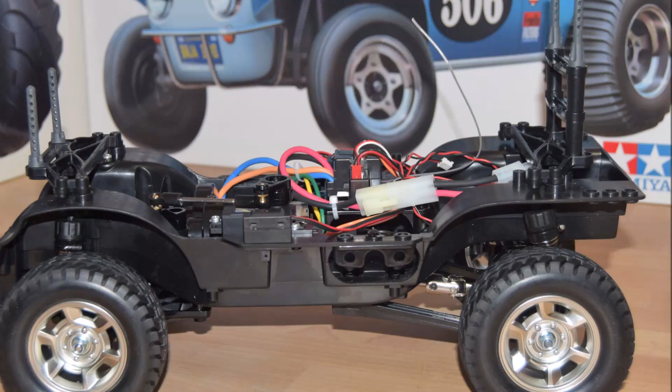Hello and welcome to my build video of the brand new Tamiya Land Rover Defender 90. It's just come through the post and we'll get started with step one.

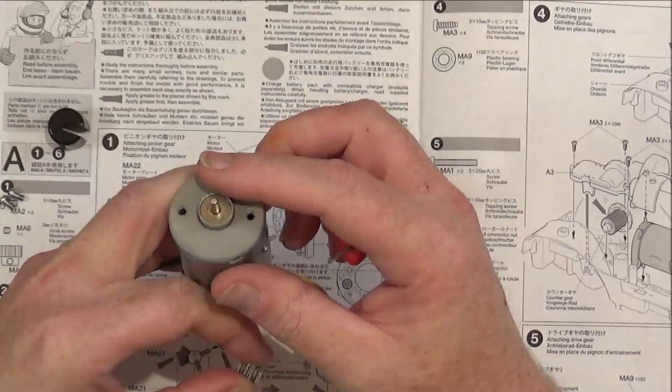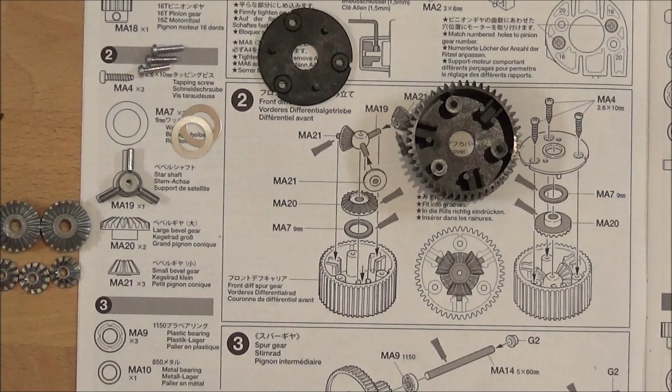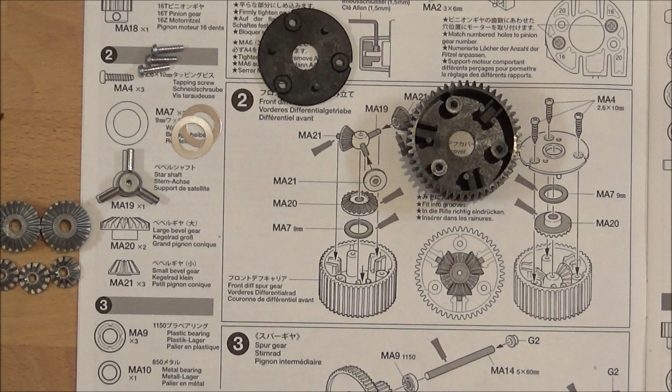Step two is building up the front differential. Now with the CC01 you can actually lock the rear diff. There's factory supplied bits to lock the rear diff, but there's nothing to lock the front. Where I'm planning on taking this for my first run video, I think I'm really going to need the front diff locked as well, using one of these little planetary gears. So I'm going to have a go at that. To lock the diff, it's got to go in there and seat in with them.

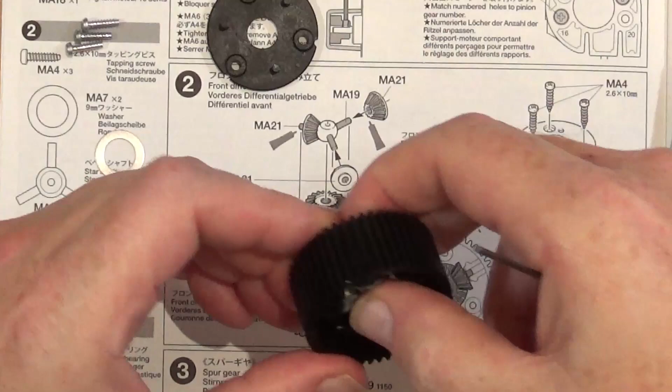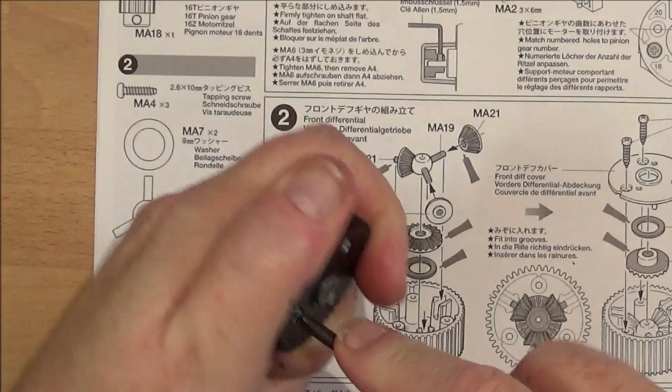They do say it's quite tricky to do. Let's try that. I think that may be in. And there we have one locked diff that I can take apart and unlock as and when I please.

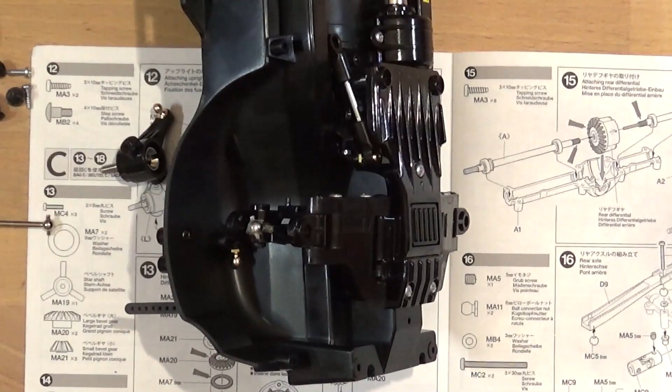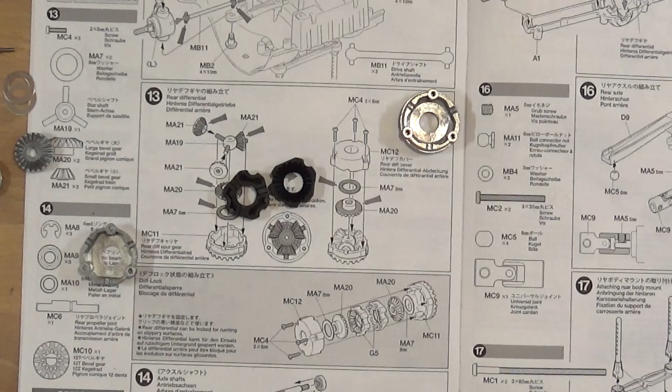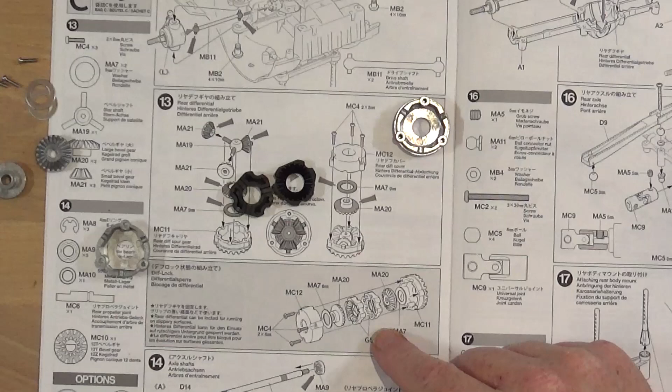Step 13 is assembling the rear differential. Now there's two ways you can install this. The first is using the crown gears and planetary gears to give you a normal differential, but Tamiya also supply two separate pieces called G5 that enable you to lock this diff without anything, like we did in the earlier one. So obviously that's the way I'm going to go. I've got my two plastic pieces, so we'll just get cracking.

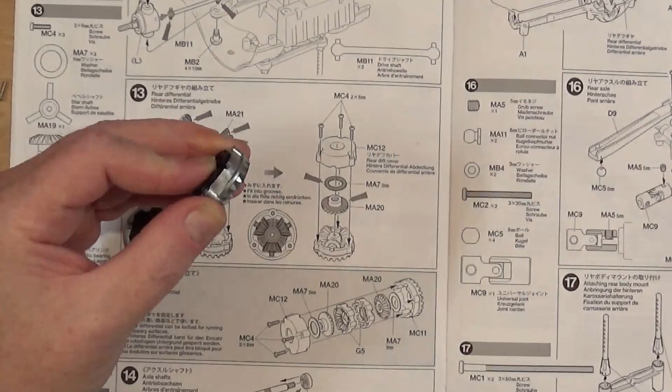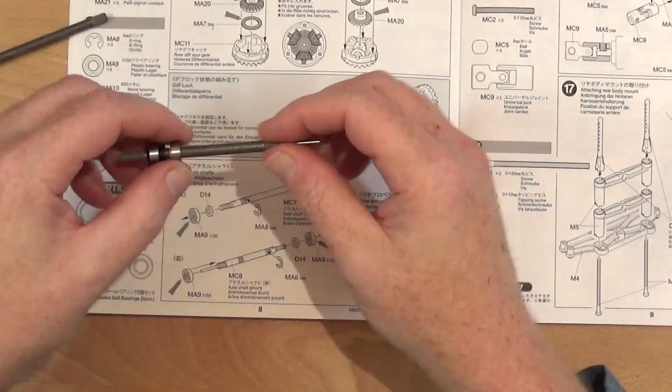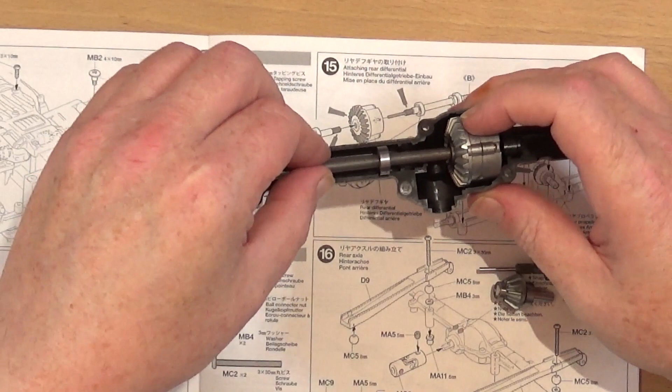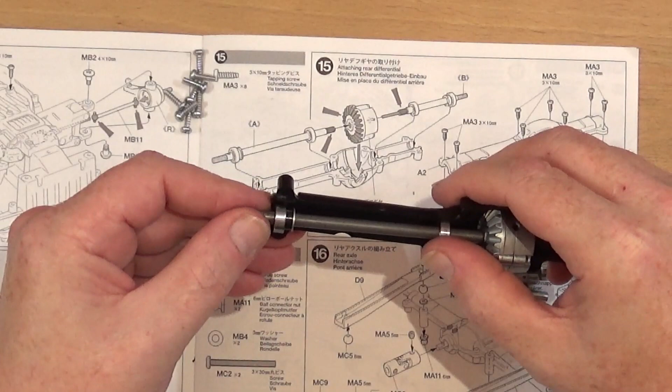Step 15 is basically building the actual rear axle. So we've got the differential and the two axle shafts, but before I start, I just want to show you something. If we pop these in here like so until it fits, there we go - you'll see, if I hold this and get it closer for you, how much movement there is in that. Ridiculous really. And it's the same the other side, which I think is unacceptable really.

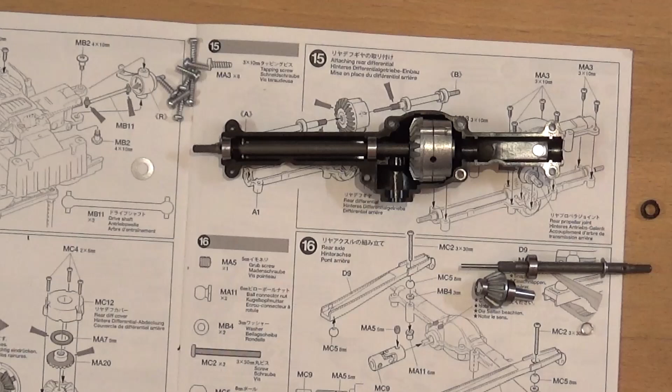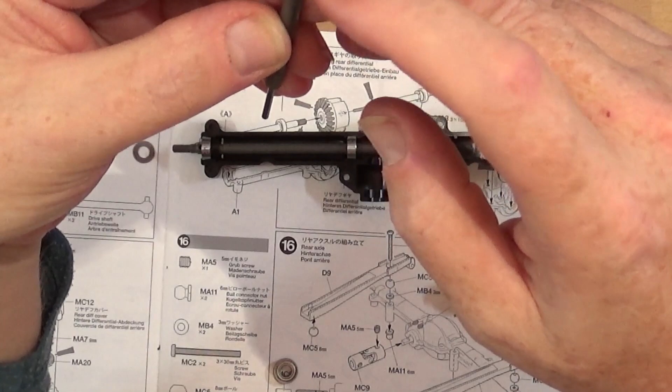So what I've come up with for this one - last time I had more of these washers that fit over, so I was able to use them, but I've only got that one. What I have found is these, basically like mini key rings - they're spring steel in a loop, and I've managed to get one of these over the shorter shaft and push down, and that's a really tight fit.

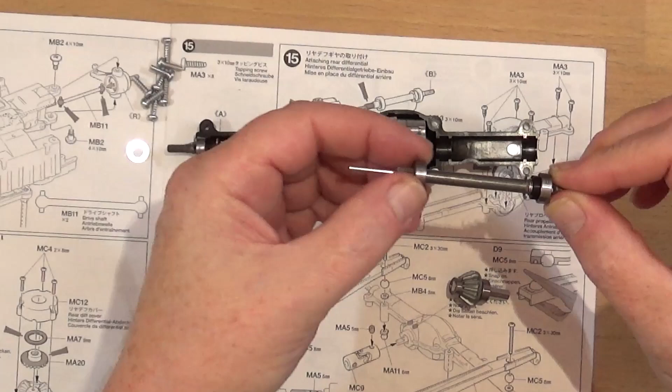So we can then put the other bits on, not forgetting the other bearing, and we can slide that in, and seat that home, and that gives absolutely no movement at all, but still gives it a nice clean unobstructed rotation. And it just so happens that there is still a bit of movement on this edge, if you can see there.

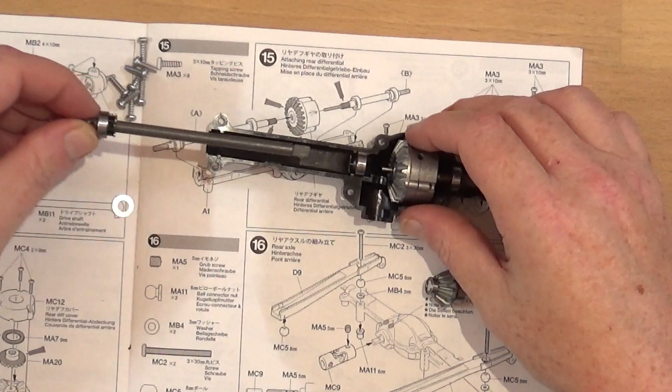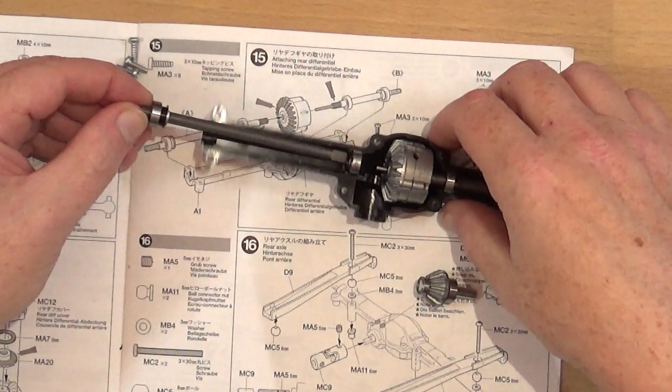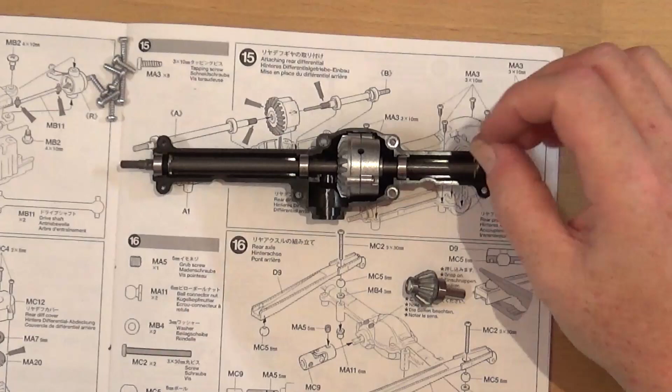Luckily for me, not being able to get it out, there we go - I've found that just one of these big, I'm not sure if they're M4 or M5 washers, fits nicely over, and then slots nicely in. A little fiddly, but not that bad. And then we've got no movement at all in the rear axle. So to me, something worth doing, but entirely up to you.

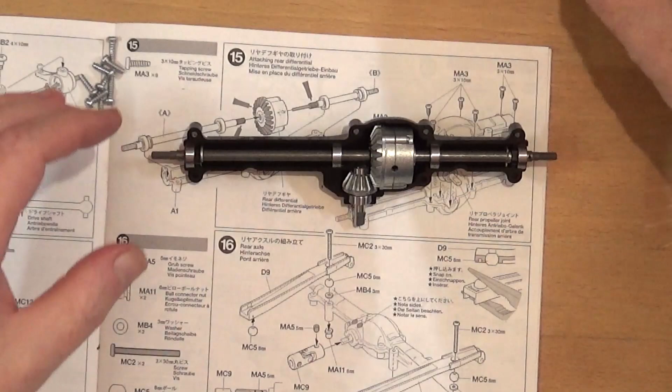The only other thing then is to install this pinion gear, which I did test and it's fine. But obviously it needs greasing up, and then the only other thing is to put the other half of the axle on. Again, I've gone round with some anti-wear grease, and it's 8 screws.

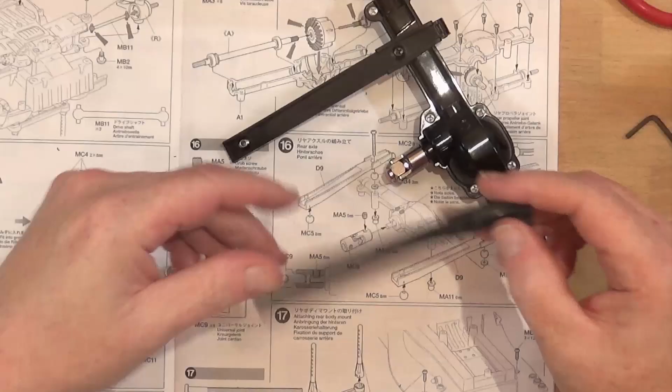Step 17 is attaching the rear body mounts. And holy moly, now that's a long screw for a 1/10 scale kit.

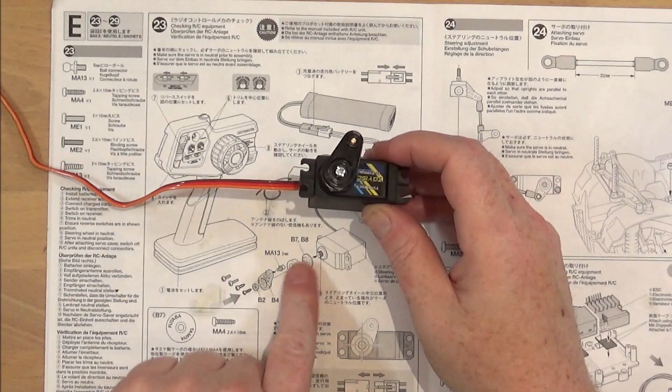Step 23, and the start of metal parts bag E, is basically centering the servo and adding the servo saver. You need to put a ball joint on the back facing backwards like so, and as you can see I've already fitted the servo saver - it depends what servo you've got, which will depend on which parts you need, either B7 or B8. So that's the servo saver installed.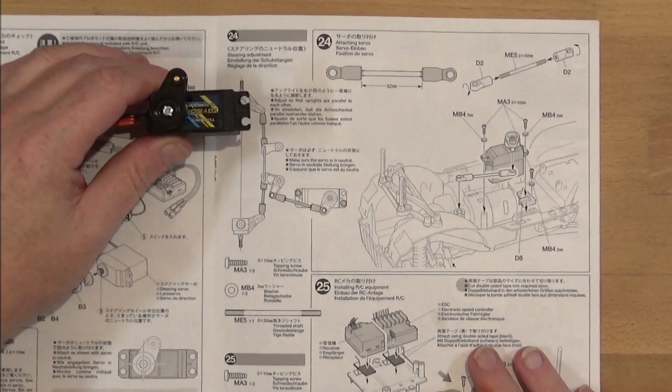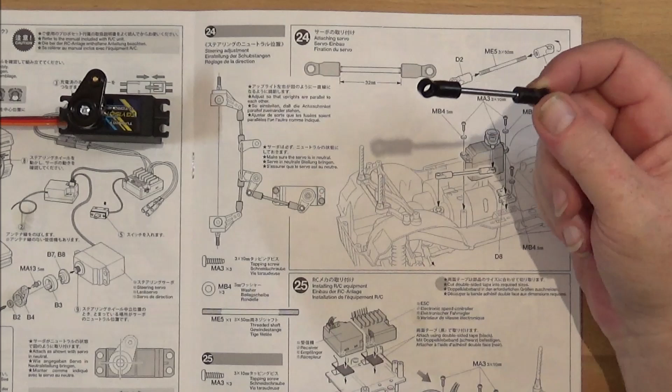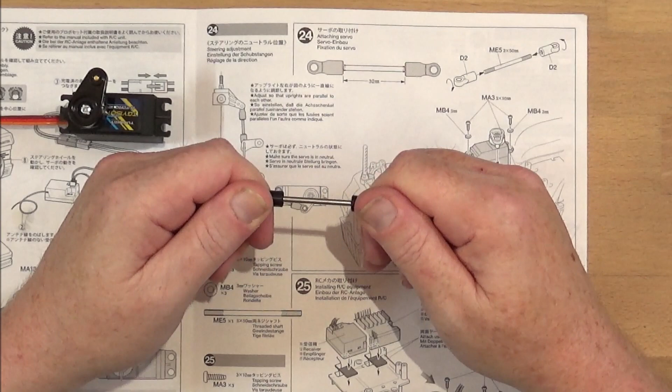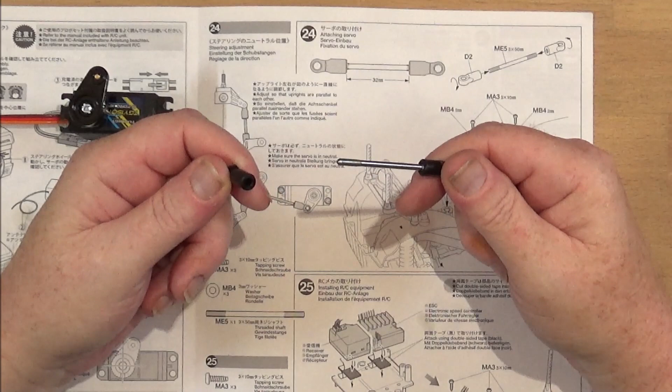We can then move on to step 24, but before we start this I've hit a problem. I was just making up the servo steering arm and found that one of the plastic ball joint connectors does that - I don't know what's happened. It's the first one ever I've had on a brand new Tamiya kit that just won't screw in.

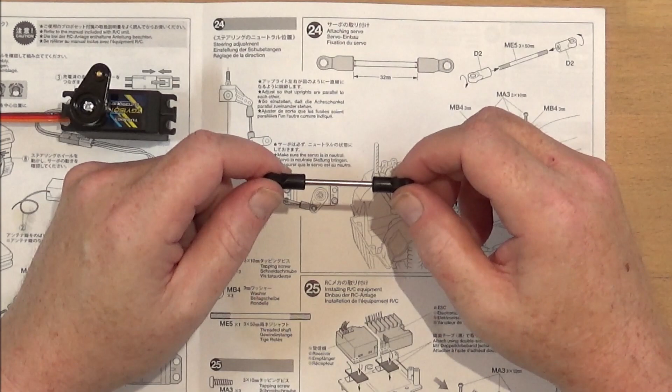So whether it was just a bad batch, I don't know. But unfortunately the kit doesn't come with any spares of these. Sometimes you get one or two spares, but in this case it doesn't. So I'm going to use some glue. Now I've never done this before, but I have been told that apparently super glue will hold the bits but won't affect the plastic, so here's a good time to give it a try.

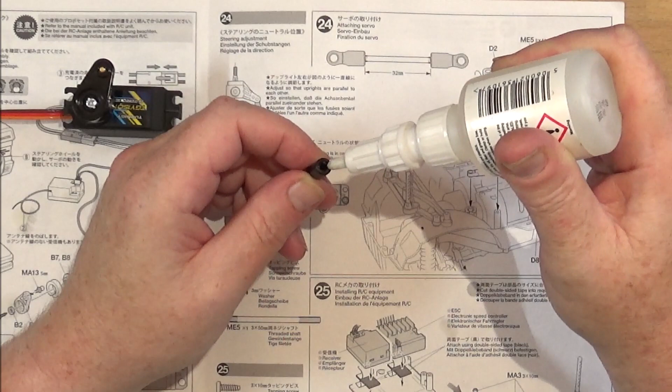This isn't ordinary super glue either - this is a really thick super glue, and it allegedly has gap filling properties. So I'm just going to screw that in, and this super glue as well doesn't set as quickly as ordinary super glue. It's not an instant set.

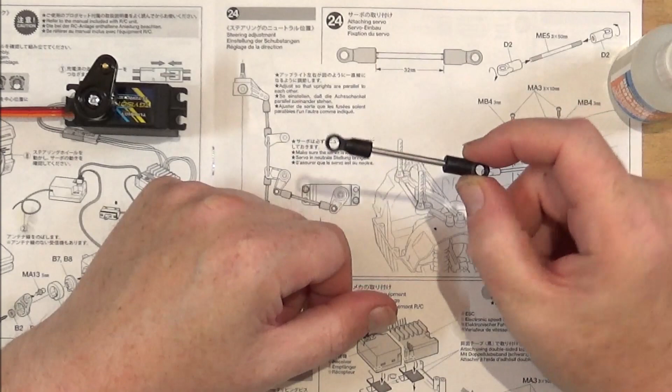So you have a bit of time to adjust the thing and get it in the right place before the glue sets. So I'm now going to leave that to set for 20 minutes or so. Maybe a good time to have a coffee, and we'll be back with you shortly.

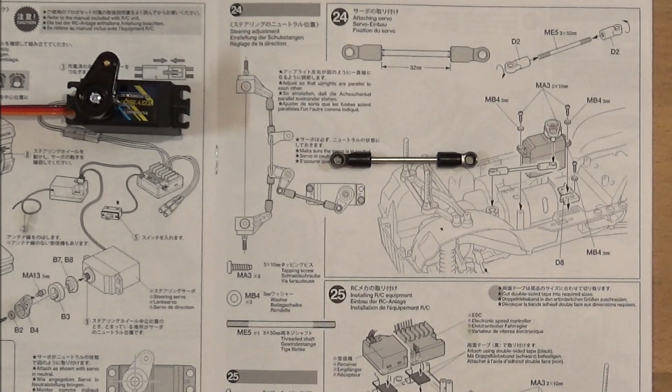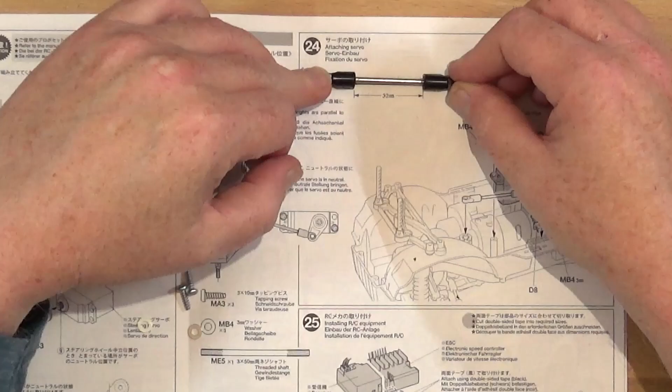Okay, the glue's had time to set and it's solid now, and I've set the bar to 32mm as specified in the manual.

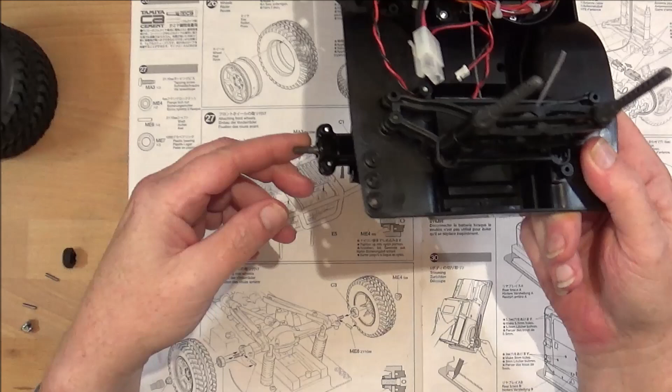Step 28 is installing the rear wheels. Bit of a confession here - came to fit one side, and this side came to fit this one, and because I'd put those spacers in, I couldn't pull this out far enough to get the steel bar through.

So unfortunately I've just had to take the whole rear axle apart, and if you remember I used a really tiny spring that's like a mini key ring, and what I've ended up doing is cutting half a circle off it to thin it down a bit, and now it fits lovely. As you can see, hopefully there's just enough play for me to get the steel pin in.

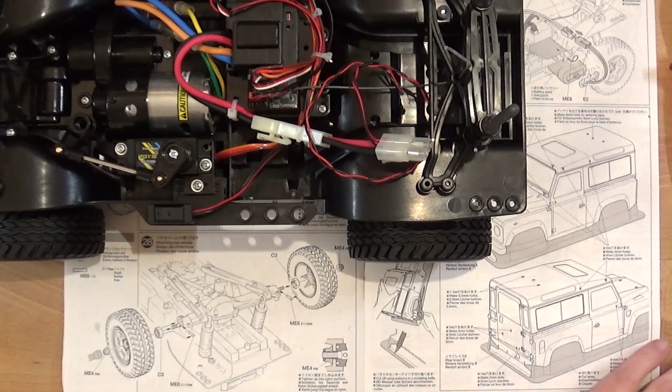And that completes step 28, and we've just got one more step to do on the chassis side, and that is to install part E2, which is the battery holder. It simply clicks in there. You've got this weird looking R clip, and it slips in like so.

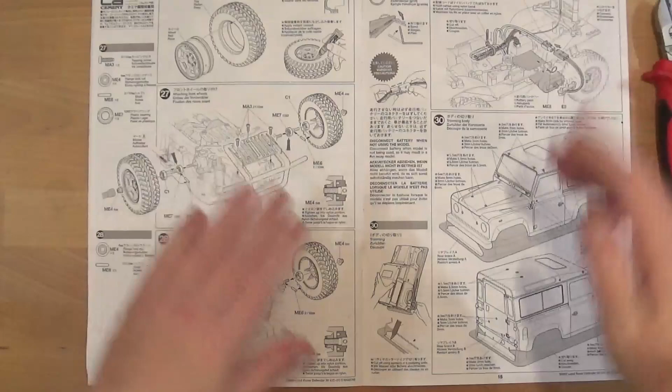And with that, that completes my video on building the chassis side of it. I'm going to do a separate video on the shell, because there's a lot to it. Just looking at it here now, if you can see, hopefully, I don't know whether you'll be able to make it out, but there's like hundreds of holes I've got to cut into it. So I'm going to do a separate video for that.